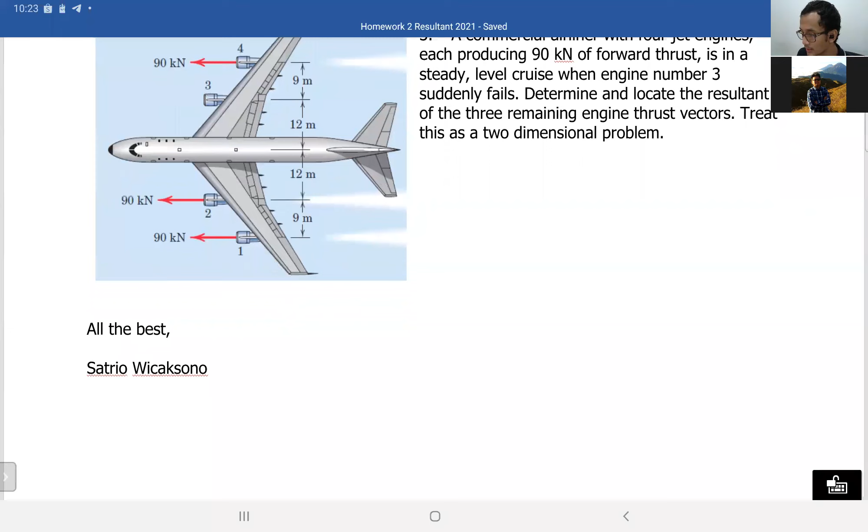Determine and locate the resultant of the three remaining engine thrust vectors. Treat this as a two-dimensional problem.

So what is the problem there? Do you understand the problem, Ananda? I suggest that since engine number three force is not there, we just calculate the net force and the net moment, and then divide to find d.

Okay, I think it's better for us to try it together. Start. My first question to you, Ananda.

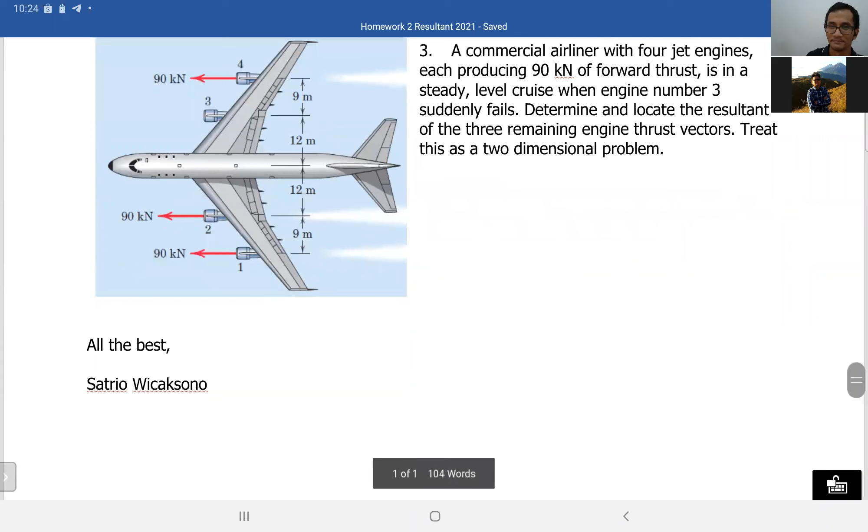But it's a bit scary. Maybe for some person it's a bit scary. But has it happened to you, Ananda? When you are in the aeroplane and suddenly one of the engines fails - thank God no one here has experienced it yet. Actually, it's better for you to not experience it at all.

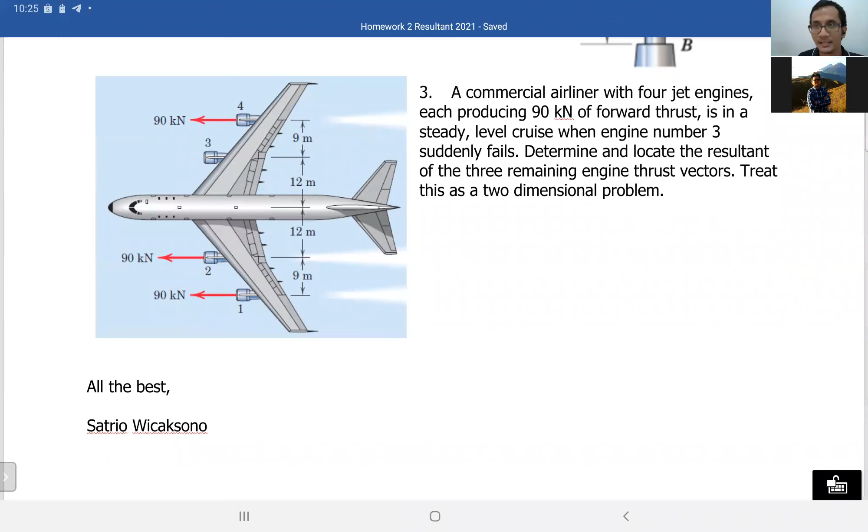Anyone here ever experienced this kind of thing before? Nope, no one. In real life or solving the problem, like in real life? Real life. Oh, thank God not yet, sir. Okay, good. I'm asking you about real life because this sometimes happens.

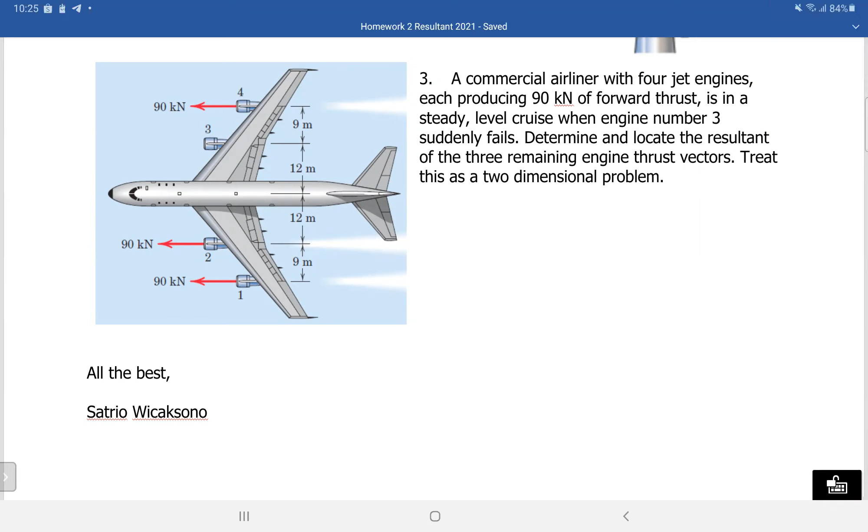To be honest with you guys, it happened to me once, and unluckily for me - it wasn't a four engines aeroplane, but a two engines aeroplane. One of the engines failed. And you know what's causing that? Anyone here can guess what normally causes this kind of problem? Maybe flocks of birds. Yep, correct. That's what normally happens, especially after takeoff or just about to land.

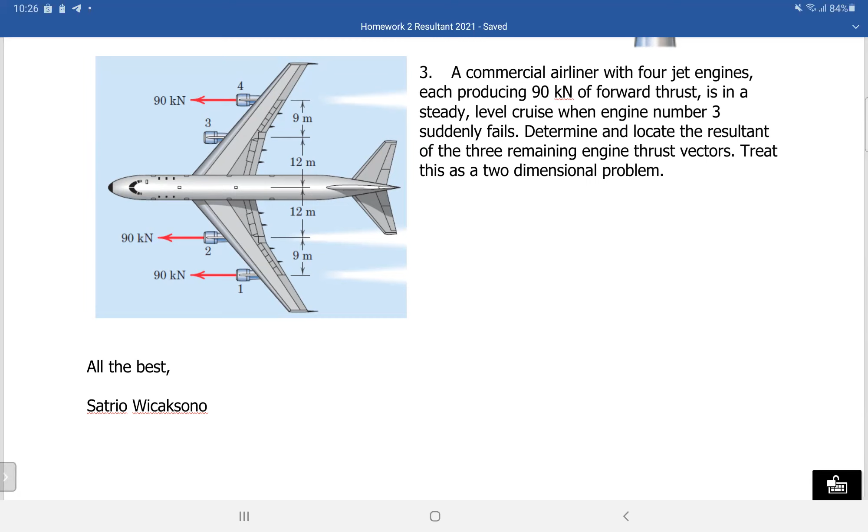But sometimes it's happening in the sky as well, though most of the time it happens just after takeoff or before landing. Because if you live near the seashore like me - I go back and forth from Singapore to Semarang several times since Semarang is my hometown - the airport there is quite near the sea, and there are a lot of birds. When the plane takes off, birds go into the engine and get blown out. One engine failed, but luckily the other was still working, so the pilot could turn around and return back to the base, to Ahmad Yani Airport in Semarang.

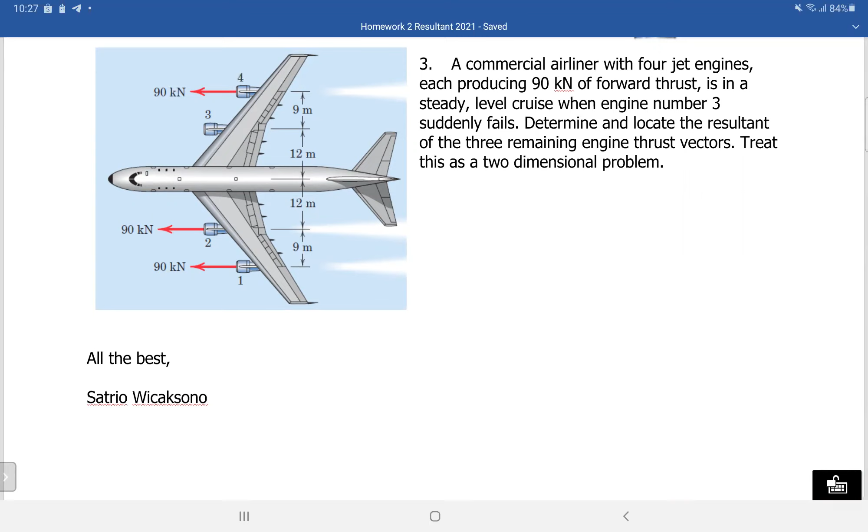It's quite an interesting experience because most of the people inside the plane at the time were praying very hard, and most of them were scared to death. That's the thing that really happened, and it can happen in real life. And now your problem is: how can we answer this?

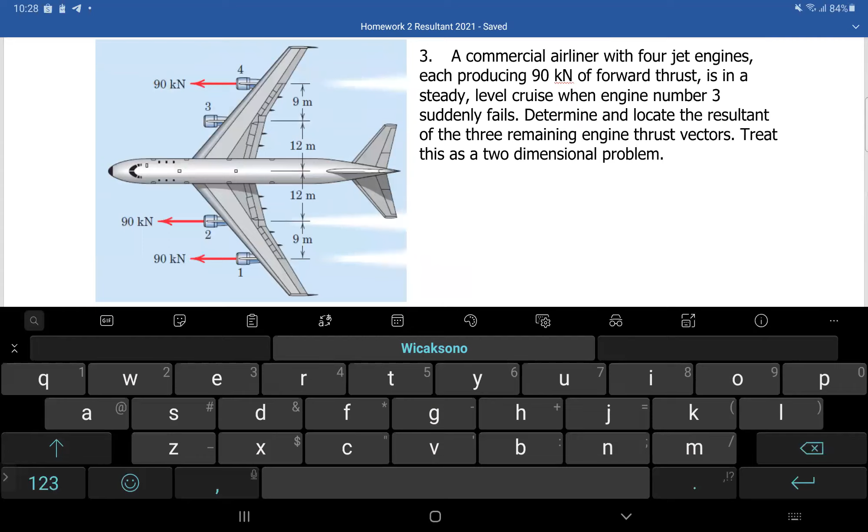So at the beginning, the four engines are working, right? But due to one problem, it started to go haywire and engine number three failed. Now the question for you is where we should put the resultant of these three remaining forces.

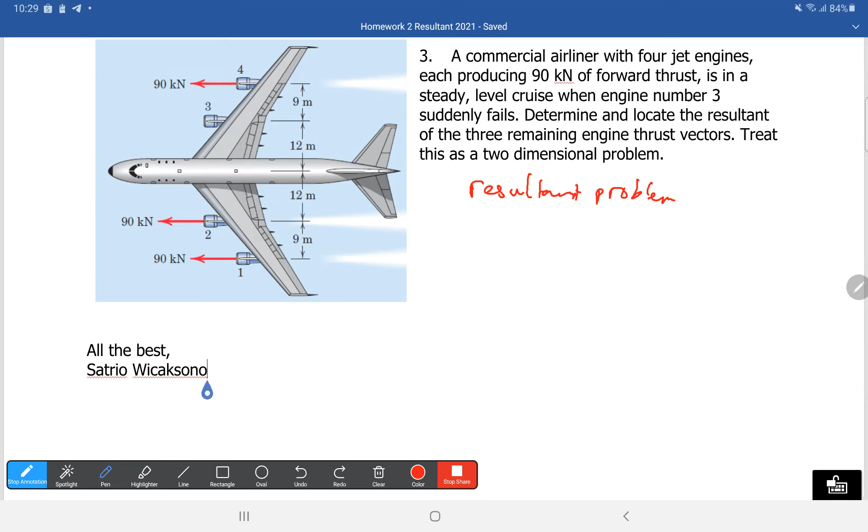So actually this is a resultant problem, and I believe I already told you how to solve this kind of thing, right? Correct. Based on what you have learned, how should we solve this problem?

Maybe find the total force first. Observe... sorry, one by one - just now the one who's talking is Ananda, right? Yes. So what should you do, Ananda? Find the total force, then find which point to put the force, where we're supposed to put it, correct?

Right, so we're supposed to find the resultant of the force. Just the magnitude is supposed to be enough? Okay, magnitude and direction, of course.

Yeah, the resultant of all three forces - magnitude and direction - and then where we're supposed to put it. That's the thing about this, because what's asked is to determine and locate the resultant of the three remaining engine thrust vectors. So it's just the same as putting one force, the total of those three, at a certain location which represents those three forces. You get it, Ananda? Which represents three forces, yeah.

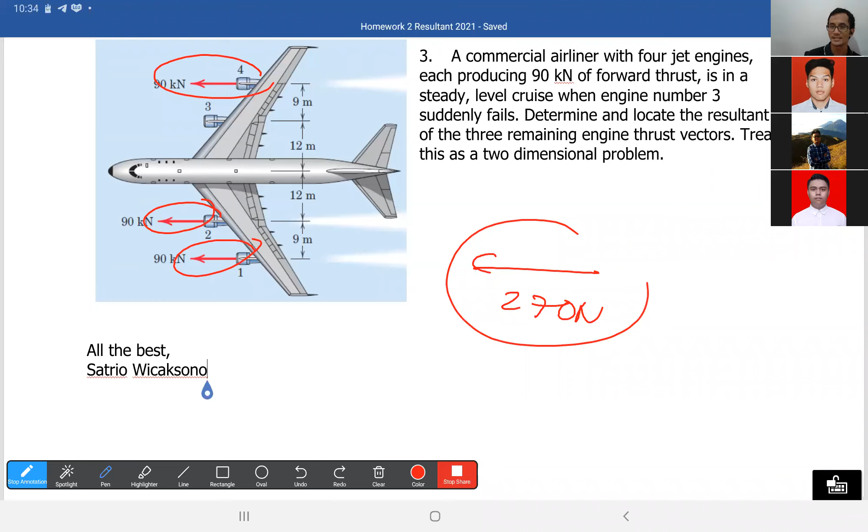Okay, and how can we determine the location, Rizky? Observe the moment, correct. Yeah, observe the moment. So the effect of the moment for those three forces, the 90 kilonewton forces, is supposed to give exactly the same moment as these 270 Newtons at one certain location. Correct, right, Rizky? Correct, Pak.

Yeah, that's it, Ananda. Do you get it? How to solve it? I see, so these three forces, 90, 90, 90, right? Those three forces will create a moment on the plane. The effect of those three forces, the moment, is supposed to be the same as one force, 270 Newtons, at one location.

So basically, I can draw it like this. I will draw another plane, which is actually exactly the same plane. Although my drawing is not as good as the original drawing, don't blame me on that. I don't have artistic skills. The same, sir, the same.

Okay, so something like this, or something like this. So basically, the effect of the moment of those three forces is supposed to be the same as the effect of one force, 270 Newton, at one certain location. The effect of those two are the same.

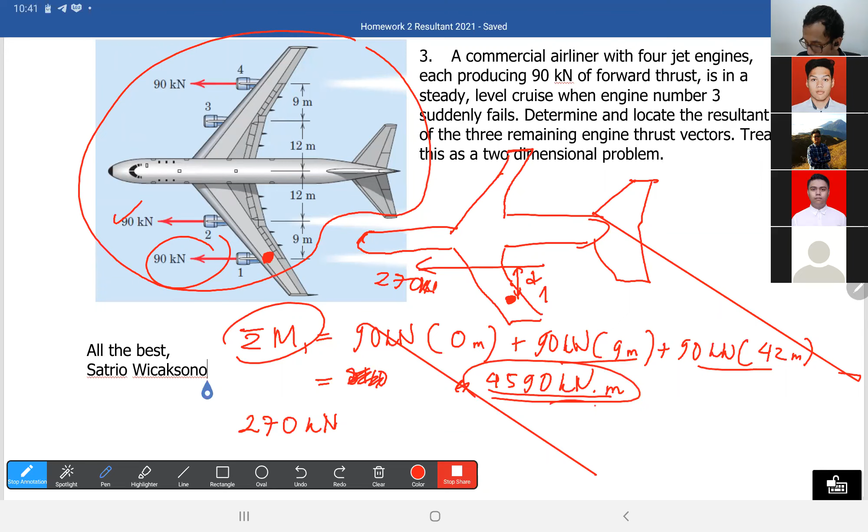So that's why we know that the 270 kilonewton multiplied by d, the results must be equal to 4,590 kilonewton meter. Okay, can you calculate d for me then?

Simple, right? Yes, so you're supposed to divide those 4,590 by 270. What's the distance there? 17 meters.

And the distance is supposed to be from location number one. So basically, if you replace all these three forces with one force, roughly it's supposed to be around here. But in that case, you have to delete these three forces first, because you are replacing those three forces with one force.

Yes, but I didn't use point one. I used the center of the body. It's exactly the same, it will produce exactly the same result.

But, if you calculate it from the center of the body, okay, because I calculated from number one, your result's supposed to be 21 minus 17, that's 4 meters. Yes, you got it correct. Okay, good, that's the correct answer.

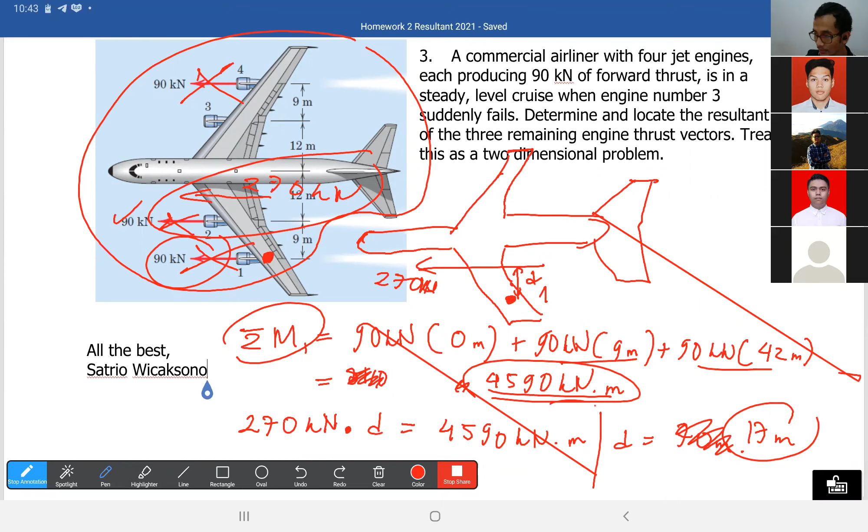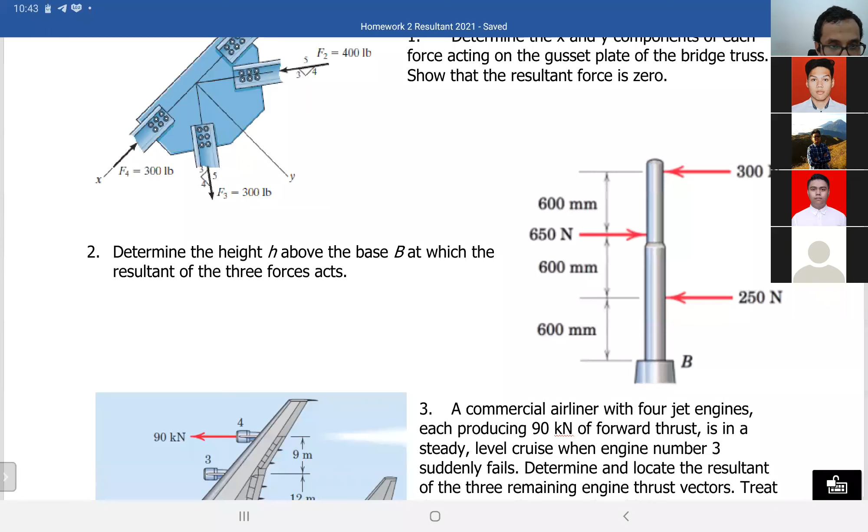Okay, good. So the solving of this problem is just like in number 2, right, sir? What do you mean in number 2? The method is similar to that of solving number 2. Oh yes, correct, the method is exactly the same. So number 2 and number 3 will be exactly the same.

Okay, number 1. All the forces are happening at one point, right? For number 1, yeah. Why suddenly? Okay, clear, for number 1, because all the forces are happening at one point, then in that case it is just a resultant of the force. There will be no moment there, right? Because all the forces are happening at one point.

So the easiest thing to do for number 1, you can divide the forces, each force, into its unit vector, then you can sum it up. That's the easiest way to do it. Or if you want to use the harder way, another way as well, without the vector, it's supposed to be okay.

How to do it? Okay, you can check it by doing it like this: sigma fx, the total sum of all the x direction force, you can calculate it. So in that case, we will have f1 plus f4 minus f2...

cos theta 2, then what else? Minus f3 cos theta 3. Something like that. That's the total force in the x direction.

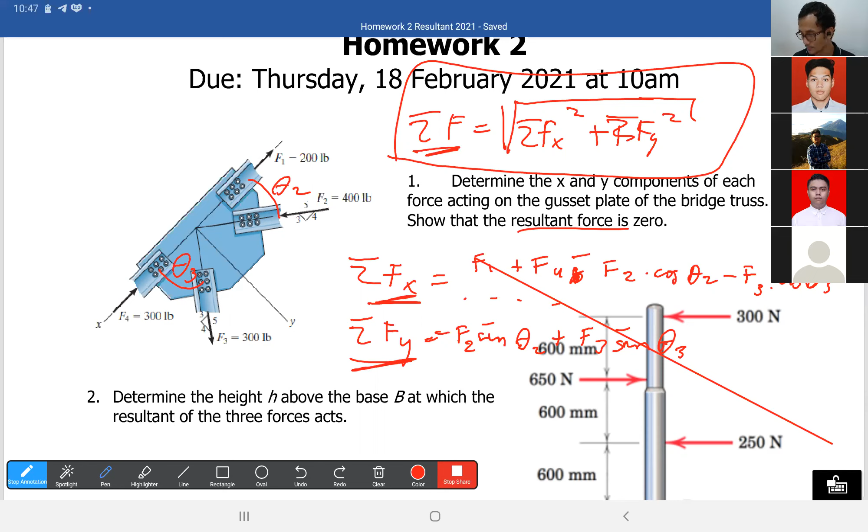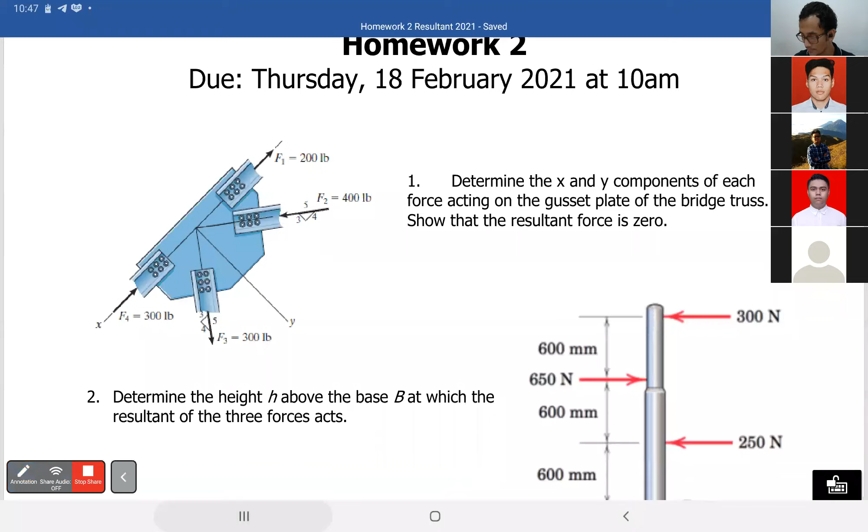Okay guys, I believe the discussion on the homework is supposed to be okay, right? And I don't think that there is a problem which is too hard to solve. Okay, stop annotation, then now we'll return back to this.

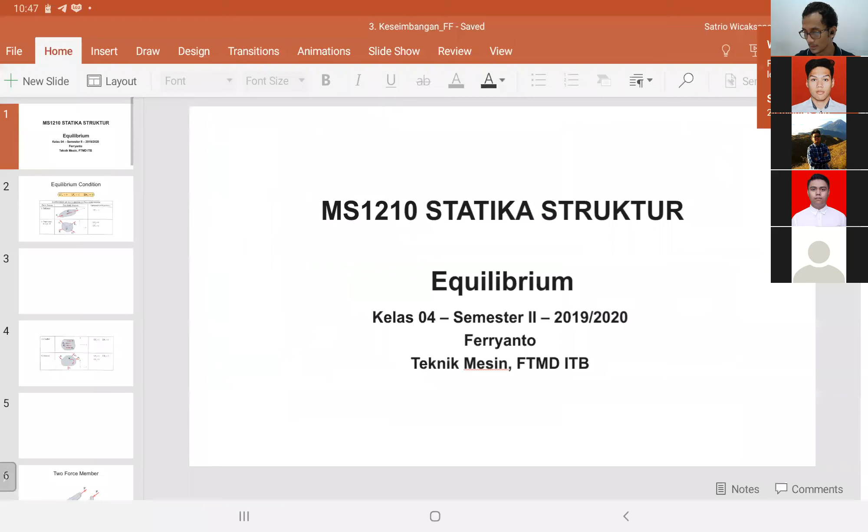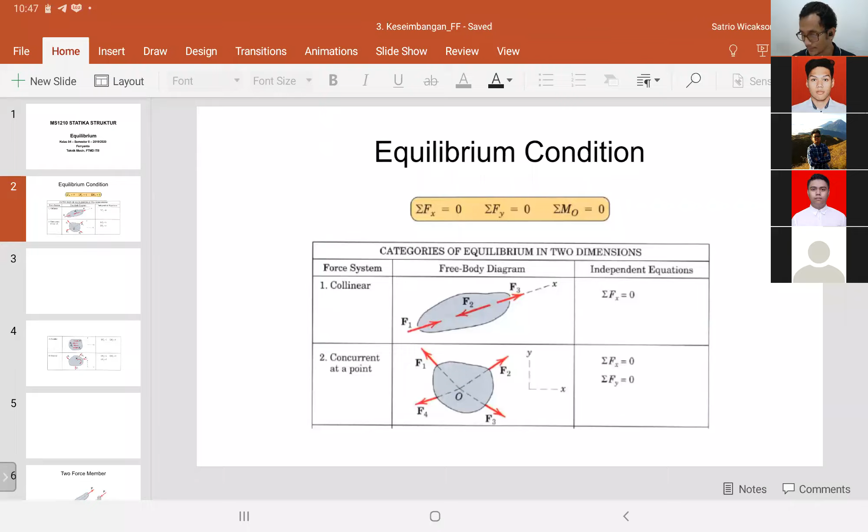Because of this, so basically I use Pak Ferry's slides because his slide is more user friendly than my own slide. Okay, but I try to translate it into English. That's all, okay guys.

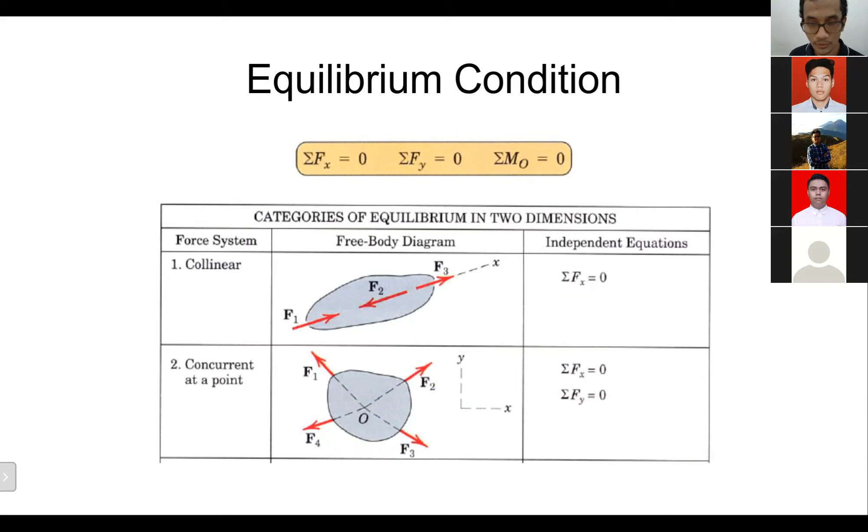I think in order to make it easier for you, I will divide the video into 2. Okay, so...